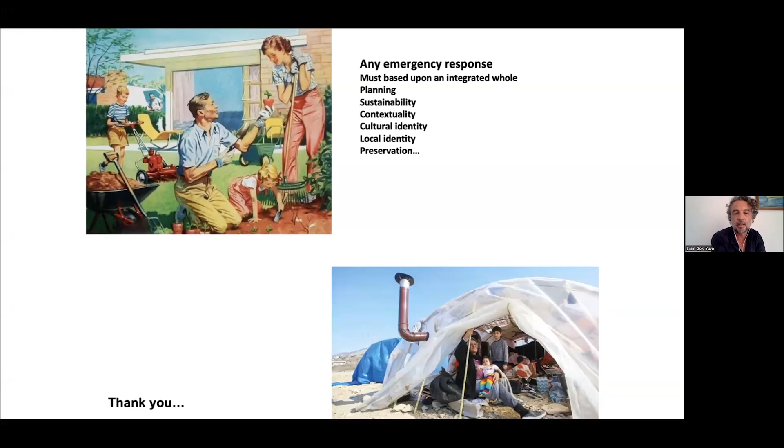Since the first morning of the earthquake, together with my friends who had earlier worked in the field of humanitarian aid, we started discussing what we could do in the region, because they were planning to go to the region, and later on they did. They analyzed the needs, they assessed the needs, and everybody will think about, of course, initially providing shelter, food, and everything else. They also told us that they need generators, they need other logistics support, and those were the reports by our friends.

As I'm in the film industry, we had to obviously stop our work. As you know, we are people who can build cities in desert areas. So we thought that maybe we should just go and help them because we have that capacity. And with the producers from our sector, we decided to go to the earthquake hit region with all the generators, with all the food, trucks, with sound engineers, with all the other equipment. We went to the earthquake hit region.

With the reflex of filmmakers, we tried to help the people in terms of logistics, lighting, because we needed professionals, and of course non-professionals also helped. We also set up another camping area for the physicians, and we mobilized some physicians. But of course, these were only the first few hours after the earthquake, and we were thinking about how we could just provide better shelter for these people, because tents will not work.

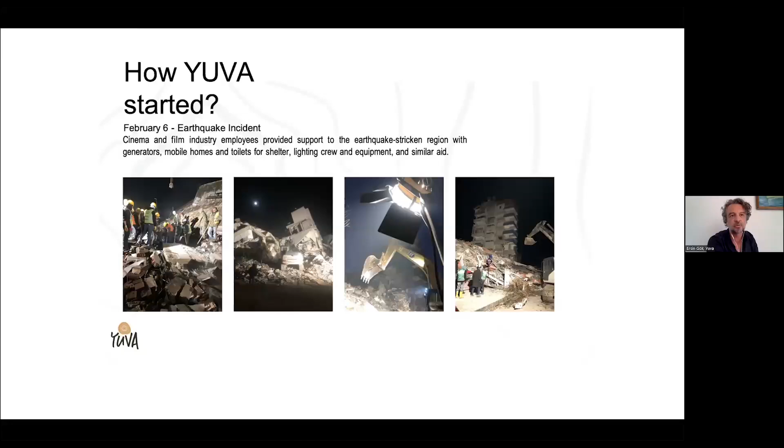And we thought that maybe we should not try to send everybody to the region and we should start working here. So we started thinking about whether we could just produce some wood or other types of structure which would be produced here and then sent over to the region. And meanwhile, here you can see the photographs. We heard about this 100 tiny house project that started.

And I thought to myself, if there is an already ongoing project, maybe we could just go and join forces and help them. So I made an open call over Instagram using my social media, and some famous people, including movie stars, actors, actresses, and other volunteers joined forces, and we really helped the project to be completed. As mentioned by Ersin and my other friends, unfortunately the materials that were sent were not sustainable.

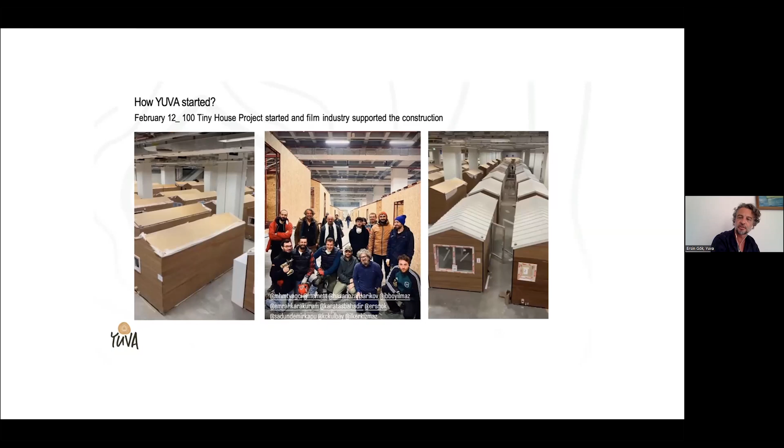The tents, containers, these would not be fit for the near future, for the health and well-being of the people there. And I told you that I am really interested in ecology. So I started thinking about why we don't use natural materials, which are easily accessible, and these might easily be shaped and formed by the people there. So we started thinking about these matters.

And initially, we started discussing this over the internet with Tuba, and we started researching which would be the material that we would be able to use. And of course, these need to be the types of houses that could later on be moved. So that was the idea.

And we wanted natural materials because we were aware of the fact that with the containers, we won't be able to come up with an exit plan. As you know, even the largest harbor in Turkey can only have 40,000 containers. And what will happen to these containers once they're used up? We know from past experience that these were later on just put in the middle of natural spaces and created natural hazards. So we decided to opt for natural materials, and we decided to name the project Yuva.

It cannot be exactly translated as home, but it's basically somewhere that you belong to. It represents both the structure and your hometown and your family.

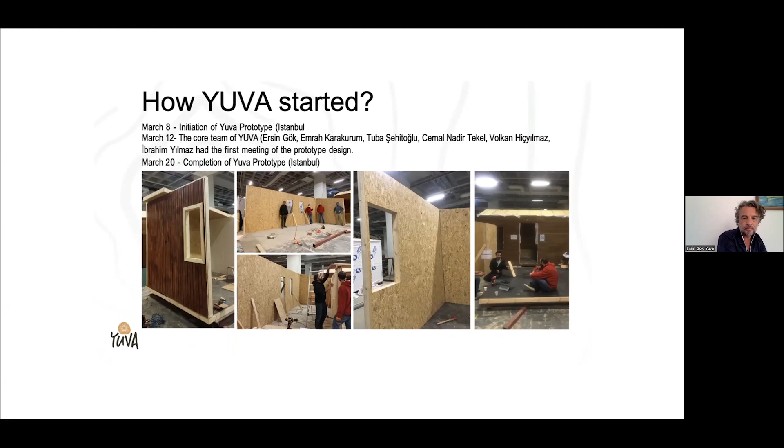So this prototype was developed, and you can see the team. And of course, in time, we started using other materials as well. And once the initial drawings were completed, we were able to complete the first prototype in March, and we were looking for funding, by the way, because initially we decided to produce the prototype using our own funds. Later on, we tried to get in touch with some donors.

And initially, we thought that we would produce these in Istanbul, but in time, we thought that it would be better for us to continue producing these types of homes in the region, so that this would also be a psychosocial and economic support to the people living in the earthquake region. And we completed the project in the earthquake region.

Here you can see we have 3 architects on our team, but the other people are either directors, photographers, and everybody, I mean, all of the people here are volunteer engineers in a way, but we had great support from some important institutions, and in the end, we were able to build the prototype. This is the first house that we built.

And for the rest of the presentation, I would like to give the floor to Tuba, because she is the architect and designer, and later on I can take the floor. Thank you.

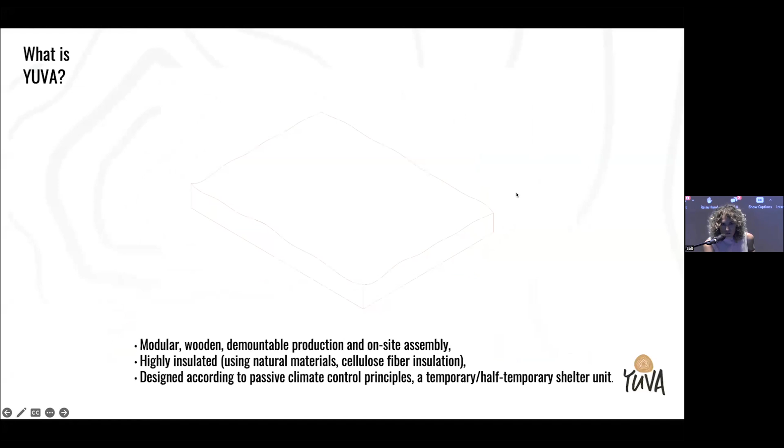Beginning in the beginning of March, and now in the middle of July, we have many Yuvas in the region actually. This one is the first one that we constructed in Hatay. And if you ask what Yuva is, it emerged with the idea of protecting people, preserving nature, and while doing this design, we also try to focus on ecological and sustainable design.

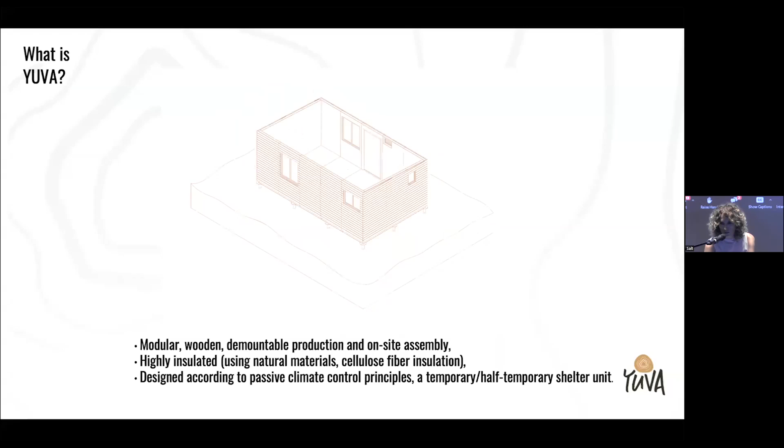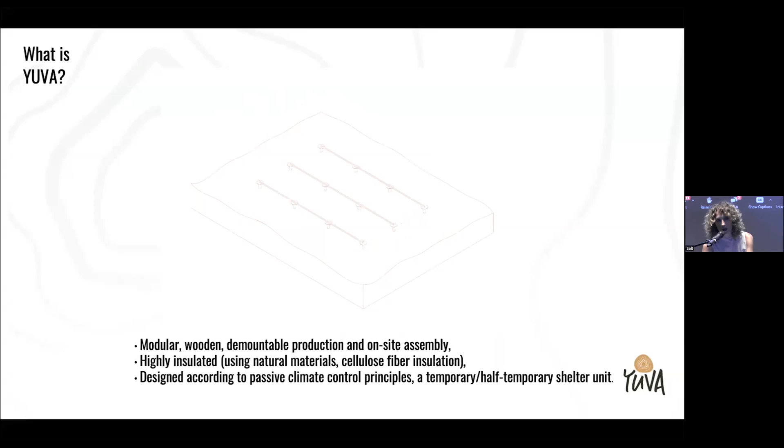And here in the GIF, we want to show you this modularity, how these units are getting connected with the small pieces. It's a standard Yuva. We have different types of Yuva. I'm going to show you in the coming sheets also. But that one is the standard one that we first designed, and it's totally modular, demountable, and it could easily assemble on site. As insulation, we use cellulose fiber insulation, which is also totally natural. And we made this design according to passive climate principles as a temporary and half-temporary shelter unit.

And the most important thing in the design, I think, is the rainwater harvesting system, the gray water, and the organic waste management composting.

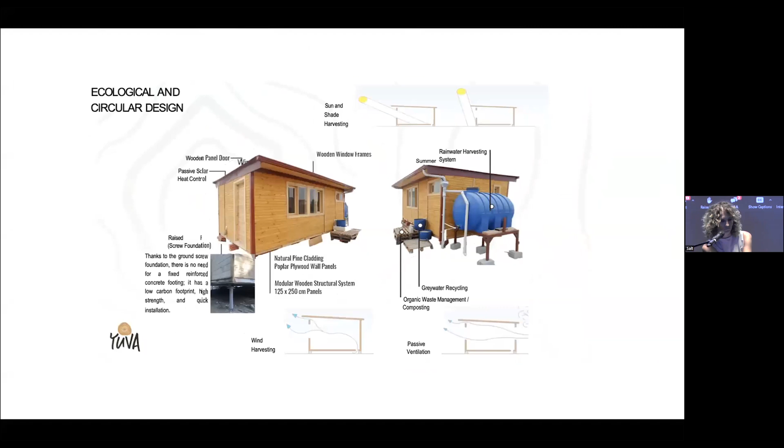Thank you very much, Tuba, this was a great summary. You see our atelier, our workshop in Samandağ. Rather than manufacturing in Istanbul, we wanted to manufacture on the ground in the region - that was our decision.

We talked to the local people, because we always believe in the locality of solutions. We needed some time to find the right people, but we did exactly that. We rented a carpentry workshop. Currently we have 30 employees, and this workshop spans over 300 square meters.

It's within an orange orchard, and you see mainly women working there. Many of our workers had never had carpentry experience prior to this, so we tried to endow them with these skills as well. There's a shortage of people, and many carpenters died, so we believed in the importance of this, and wanted to find the right people and transfer this know-how to them.

We thought it was a great idea to involve them in production. Maybe these people will manufacture these houses for others, maybe for themselves, once they have this knowledge and skill set. This was one of the most important features of the Yuva project for us.

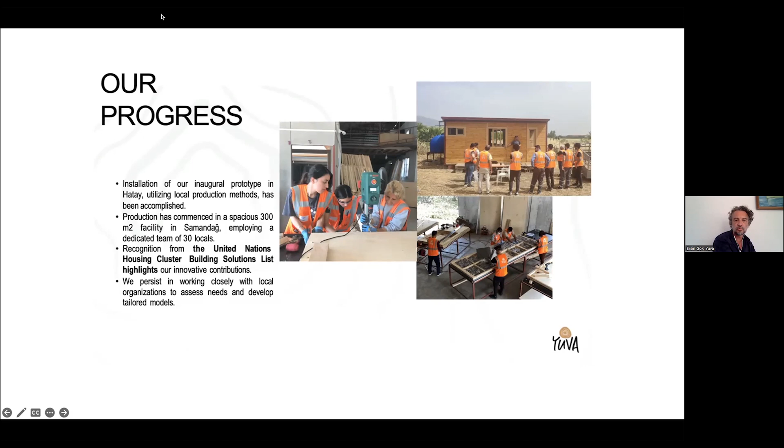Also, this project is now being supported by the Shelter Cluster of the UN, as an alternative to containers. We liaise with other NGOs and government authorities as well, because people have realized that containers are not a viable solution, be it in the short term or the long term. People have come to understand this, which is why we try to develop the Yuva project even further and spread it across the world.

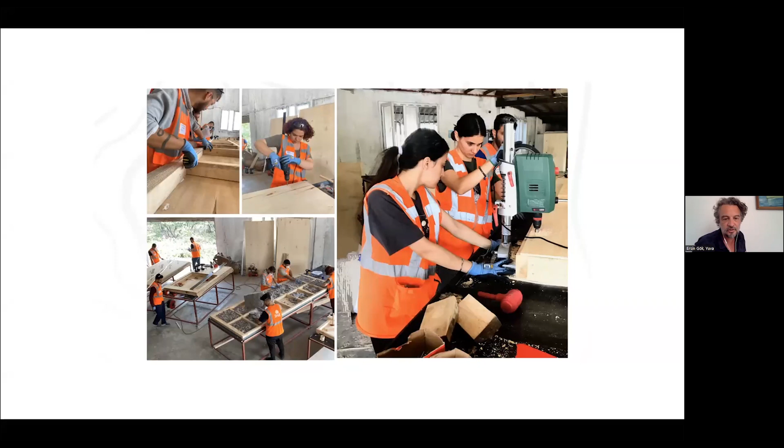And you see our employees, our workers, and the insulation material. It's all made of recycled papers, and it has a high insulation capacity. There's a huge difference, at least 14 degrees between containers and our houses, and you no longer need AC. There's an electricity shortage in the region anyway, so this is quite a good modification, we believe.

Maybe you are aware of this celebrity called Karsu, a Turkish Dutch singer, and her family. Unfortunately, she lost many family members in Hatay, so she raised substantial sums and came to the region. We met her, got in touch with her, and she wanted to come and see us working. You see her in a module. We are explaining the project to her, and she also wanted to come and work with us, have some hands-on experience. This was good in terms of visibility, and we are hoping to start a crowdfunding campaign in the near future to shore up more funds.

Now, in the previous slide, you saw a module, and now Tuba is going to tell us about what we can actually do with Yuvas, with these houses, and how we can put them to use. Now, over to you, Tuba. Thank you.

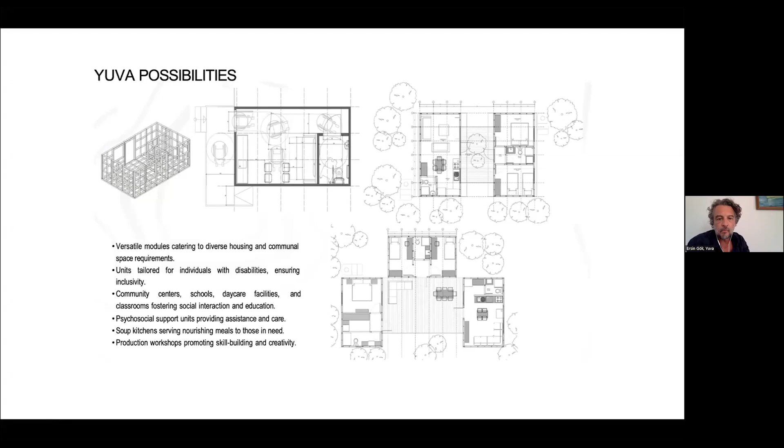We also use Yuvas for training areas, for educational classrooms, for kitchens, for sanitary areas that include showers and laundries, and also U-shape Yuvas for psychological support units and workshop areas for the women support centers.

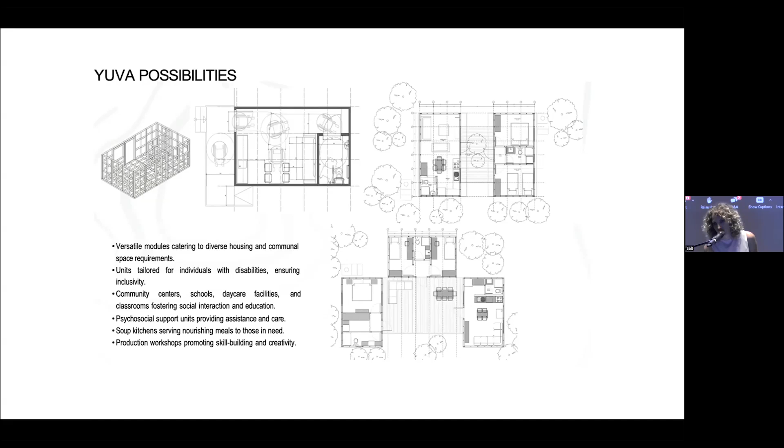Now I'm going to show you this design for Amazon Turkey. We are collaborating with them with 3 Yuvas, a U-shape Yuva, which is a child-friendly psychological support and activity area, totally purposed for the children to adapt to their daily life and integrate it with strength and resilience.

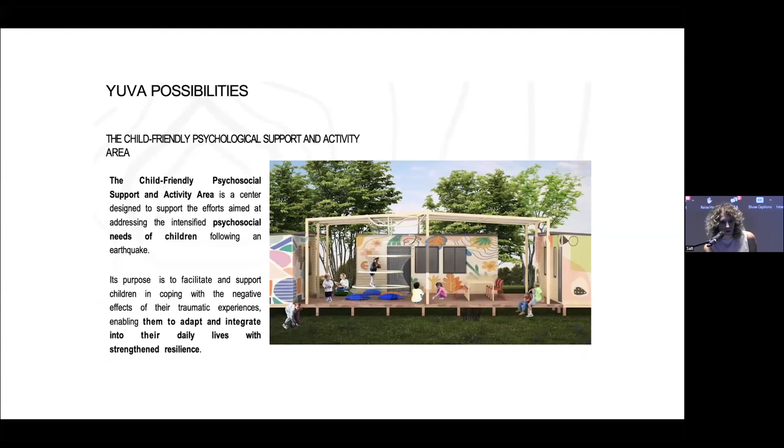And this one also is larger. I may say that it looks like a campus, or maybe it could be a village. We are working with that center and with another collaboration, and still looking for collaborations. It's a support center for women in life.

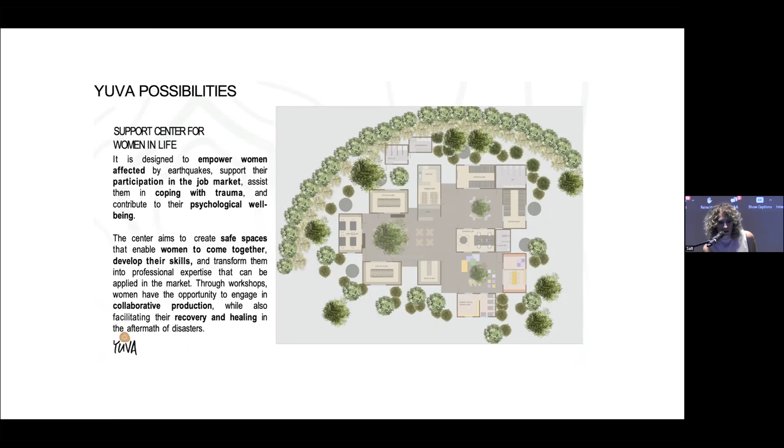Here in the plan on the left side, we have the workshop areas and open terraces. As Ersin mentioned, we are very focused on women getting back into daily life through production and employment, and that's why there are shops where they can sell their own products. On the right side, we have a training center and childcare center, because when you mention women, you need to create an area for their children, where they can leave them safely. So these centers aim for women to come together and develop their skills.

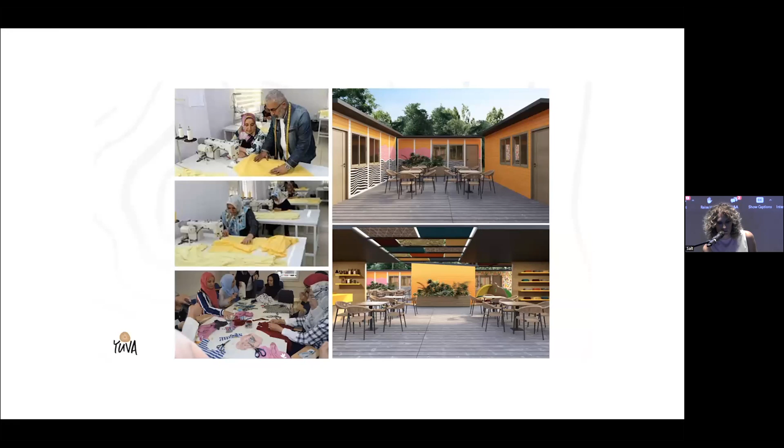Here are some render examples. For this design, we already worked, and this is the current execution. This Yuva is for the Spastic Children Foundation of Turkey.

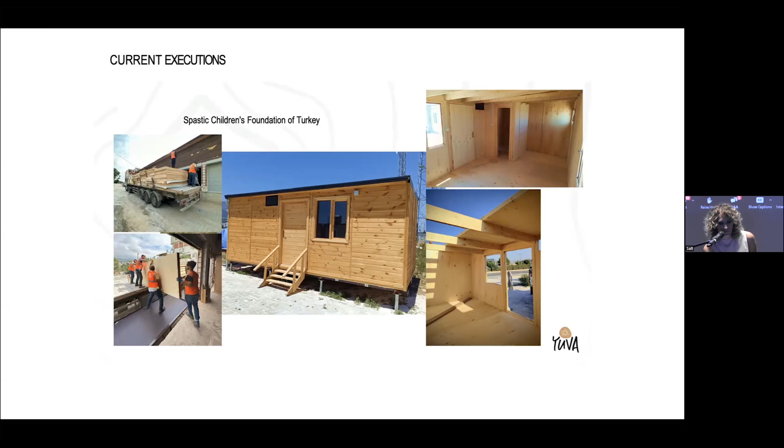Thanks to God, we completed it, and now they started to welcome visitors, their children. This one is an individual demand for a family, and it's also finished, and now the family lives there.

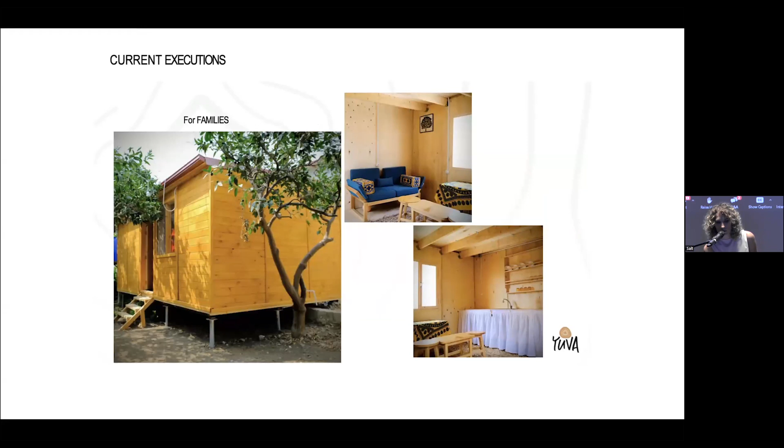Before we finish the presentation, I'm going to leave the word again to Ersin for our exit plan.